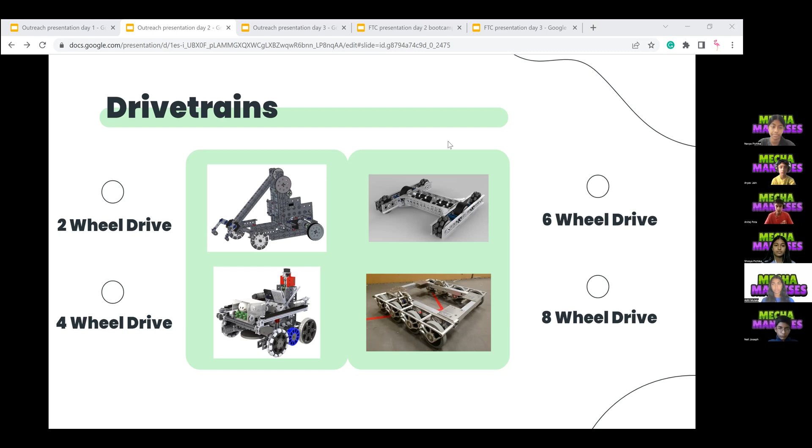The last type of drivetrain we will be covering today is the tread drive, which are wheels attached to a tread or belt. Some advantages of this type of drivetrain is that it can run on any texture of ground, has good traction, and it doesn't take up too much power. However, some disadvantages are that it isn't very fast, it is hard to build, and it is prone to damaging.

Now we'll be moving on to the different types of intake systems. The two types of intake systems commonly used in FTC are roller-wheeled intake systems and tubing intake systems. In the roller-wheeled intake category, there are a variety of intake systems, including compliant wheel intake, foam wheel intake, and rubber band intake.

The compliant wheel intake has wheels that spin, and those wheels are attached to movable claws. Depending on the size of the object the robot is trying to pick up, the compliant wheels intake adjusts itself to fit that object. Now let's move on to the foam wheel intake, which is quite similar to the compliant wheel intake, but the only difference is that the wheels are made of foam.

And lastly, the rubber band intake, which is basically a container made up of rubber bands so that the robot can intake elements of weird and different shapes.

This type of intake system is most commonly used with elements that are spheres. Some advantages of all these types of intake systems is that they are very controllable and great for picking up elements that vary in size. But the disadvantages is that they can only pick up one element at a time, which makes them inefficient.

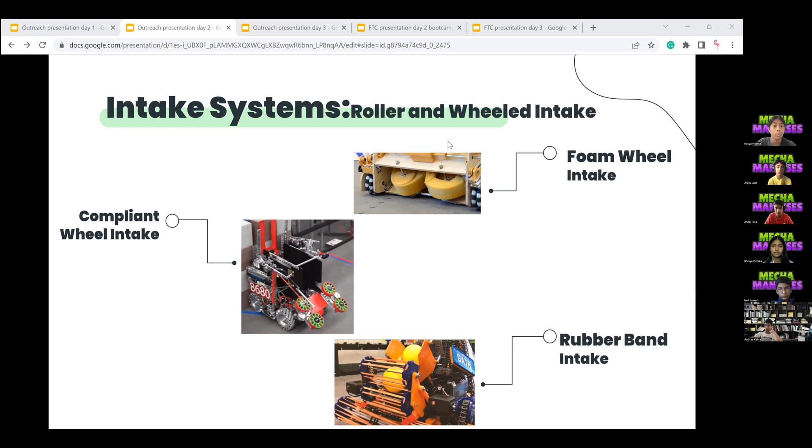Now we will be moving on to the tubing intake category, which consists of the surgical tubing intake and the 3D printed intake. The surgical tubing intake is a roller that has surgical tubing attached to it, so as the roller spins, the surgical tubing will be able to intake the object.

Next is the 3D printed intake, which is similar to the surgical tubing intake. However, the only difference is that the surgical tubing is replaced by 3D printed parts.

Some advantages of the tubing intake systems are that they could collect multiple objects at once, and it is more efficient than the other intake systems we've covered, and can intake objects of small and weird sizes. Some disadvantages are that it requires a lot of rotations per minute, or RPM, and you have less control over how many objects you're intaking.

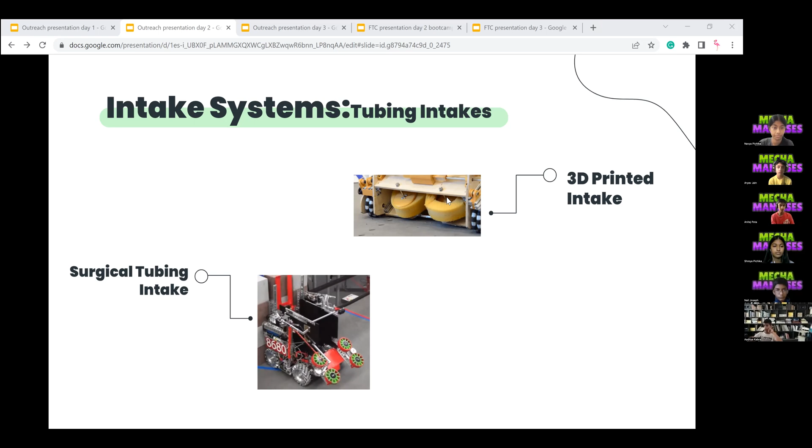Now let's move on to the outtake systems. We're going to just discuss the linear motion outtake systems. Linear motion is defined as motion in a straight line, so it just goes up and down. There are many different types of linear motions, but today we'll just be covering rack and pinion, linear actuators, and linear slides. First, starting off with the rack and pinion.

The rack and pinion works by using a gear to move an extended piece. Connected to the extended piece is a rack, and basically the gear has to move up the rack to move the extended piece up. Some advantages about this is that it's reliable, strong, and powered in both directions of movement. So when the gear moves up the rack, it moves the extended piece up.

But when the gear moves down the rack, the extended piece moves down. However, the rack and pinion is bulky and heavy, which can lead to some problems in the tournament. It's not really good to have heavy parts because that makes your robot a little bit slower, which isn't good.

So now let's move on to the linear actuator outtake system. The linear actuator works by having a lead screw, and the lead screw works with the metal bar that extends outward. So the lead screw and the metal bar are kind of attached to each other, and when the lead screw spins, like you guys have seen a screw, right?

So when it spins, it tightens or loosens, which causes the action for the bolt to go up and down. The many pros of this outtake system include the most torque, which means the force that causes an object to move along an axis. It's really reliable and can't move downwards despite the amount of force being put on it, and it's useful as it can maintain its position under compulsion.

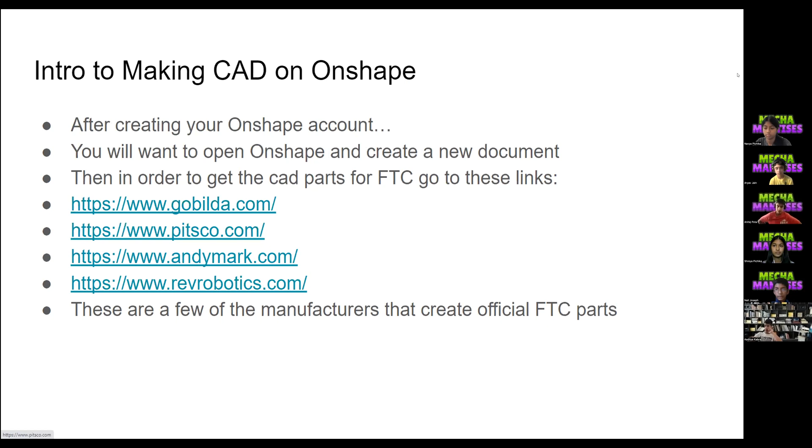Pitsco creates the parts for FTC under the brand Tetrix. On the website, search up Tetrix and choose the parts and kits that you want. Under every description, you can find the step files, CADs, for each of the sizes or types of the part. These are what you import into the CAD software, which for this tutorial is Onshape. Tetrix parts are usually more lightweight and less durable than other manufacturer parts, so keep that in mind when creating the CAD.

GoBilda is another manufacturer you can buy legal FTC parts from. Like Pitsco, under every description you will find the CAD for the parts shown. However, GoBilda downloads these parts as a .zip file, so you actually have to extract it, which I'll show you later on.

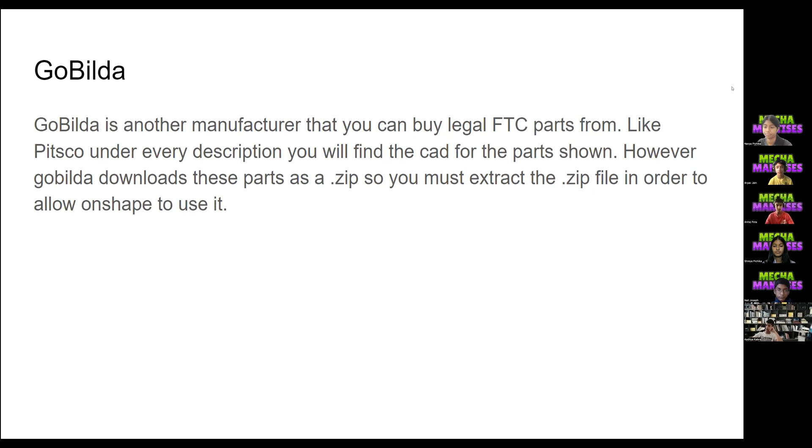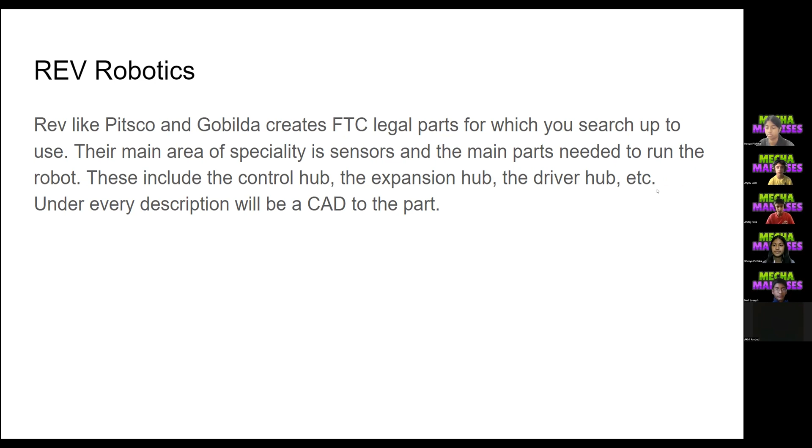Rev Robotics, like Pitsco and GoBilda, creates FTC legal parts which you can search up on their website. However, they mainly specialize in sensors and the main parts needed to run the robot, including the control hub, the expansion hub, and the driver hub.

Now I'll show you where you can go, here are some of the links. I'll mainly be using GoBilda parts for this demonstration, but you can go to each website and see the description. I'll be making a basic CAD of basically just a motor connected to a wheel, so we'll first find the motor.

GoBilda offers many different motors, all at different RPMs. When you click on the link, you'll find the description, and underneath it you will find the step file, so just download it. As you can see, it's a .zip file, so you have to go to File Explorer.

The process is similar on a Mac, but this is a PC, so go to downloads, then extract all, extract, and this is it. Okay, so now we go to Onshape. When you go to the Onshape website, you will find this, so I'm just going to go in. One second.

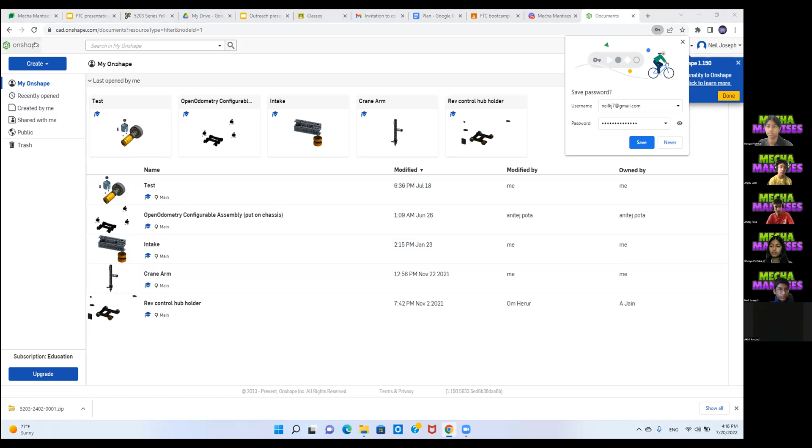When you log in, you'll find a screen somewhat like this. You'll want to go to Create and then Create a Document. And when you load into the actual CAD interface, this is what you should see.

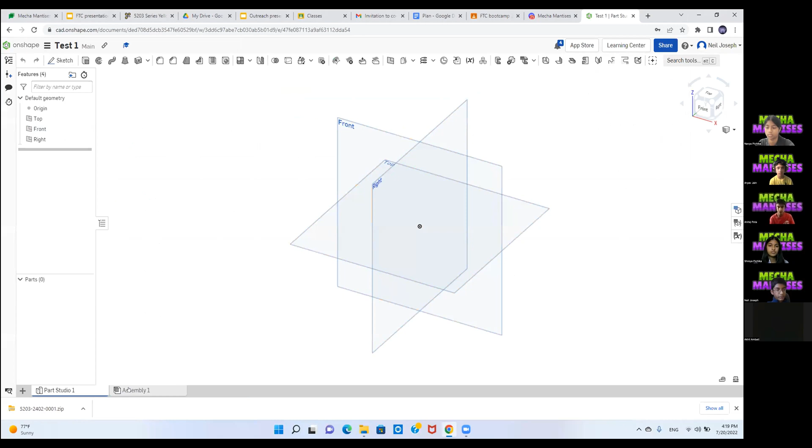Here's your part studio, so basically any custom parts that you want to make. And then this is your actual assembly, where you take all those parts and put them into the assembly.

So if I want to import the motor that I just downloaded, you go to Import, and you go to Downloads. And like this, you should.

For motors or any complex parts made of many parts put together, if you create a composite part, then when you're making the CAD and attaching it all together, it stays together. If you don't create a composite part for these complex shapes, CAD will actually separate it out. So for anything complex like a motor, you'll want to create a composite shape.

As you can see, upload in progress. And now I'm just going to go back to get the other parts needed for this.

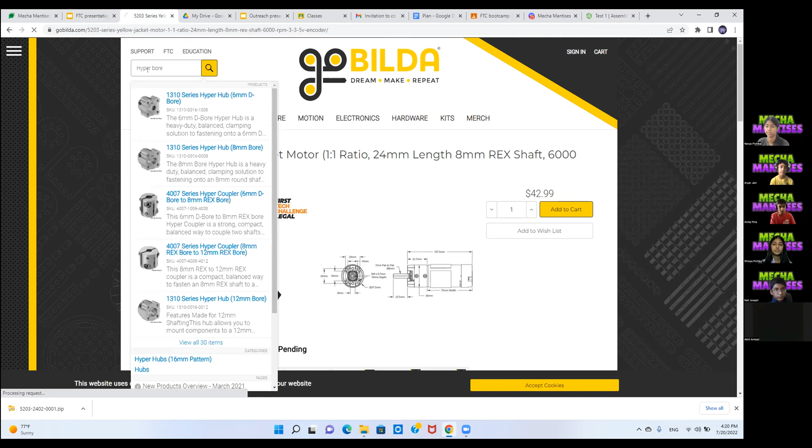So a Hyper Hub is actually what you use to connect an axle to the wheel. Step file.

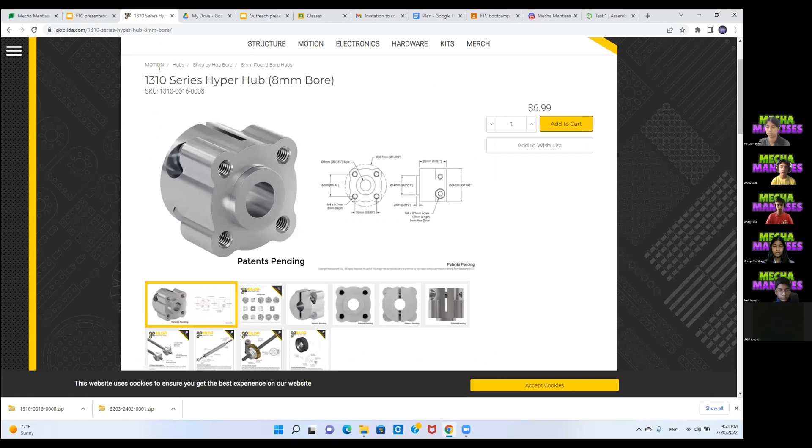Extract. Extract on.

Okay, so now I'll go to Onshape for this. So for wheels and shapes that aren't made of different parts, you don't necessarily have to make a composite part, but I'm going to do so anyways.

And while that is happening, I'll go ahead and import. It will take a little bit of time for it to show up in your Part Studio, but once it does, you can simply click on it.

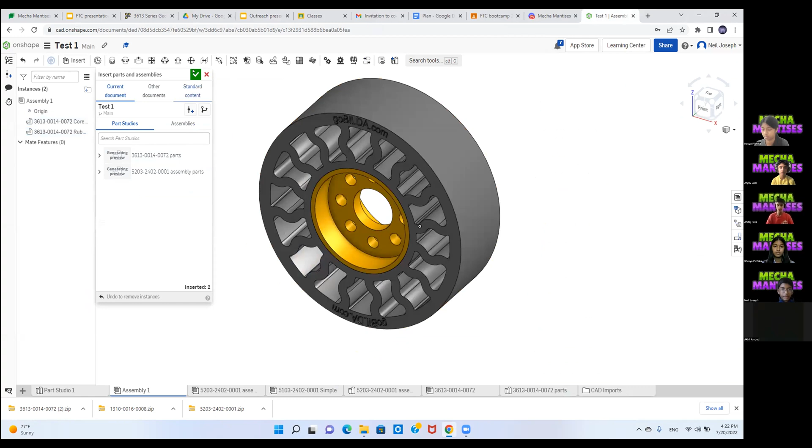Here's our wheel. Now you want to just press it down like that and check mark it. And so now you have a wheel in CAD. So now if I do that, I can now insert other parts into here.

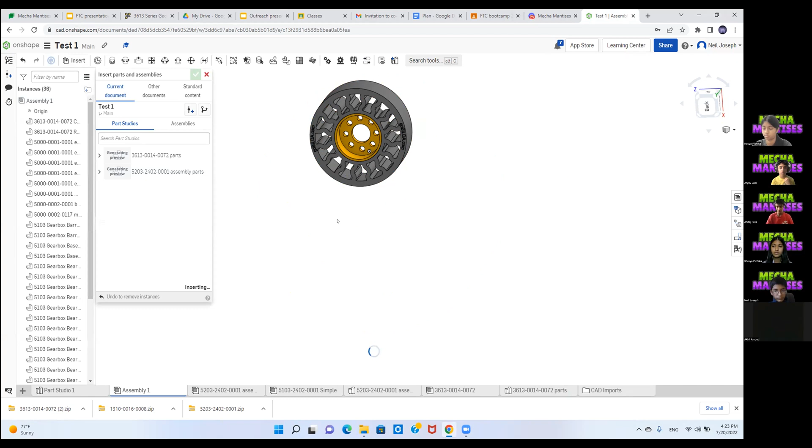That is interesting.

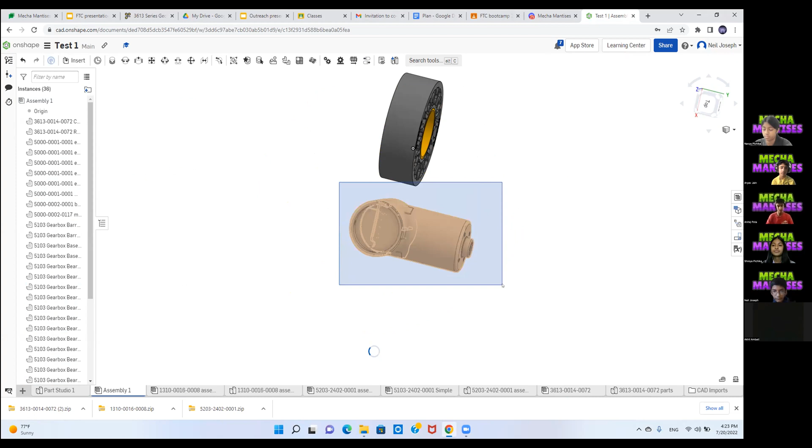And I'll go back to our file explorer, go to Downloads, extract all, extract, and I'll re-import this.

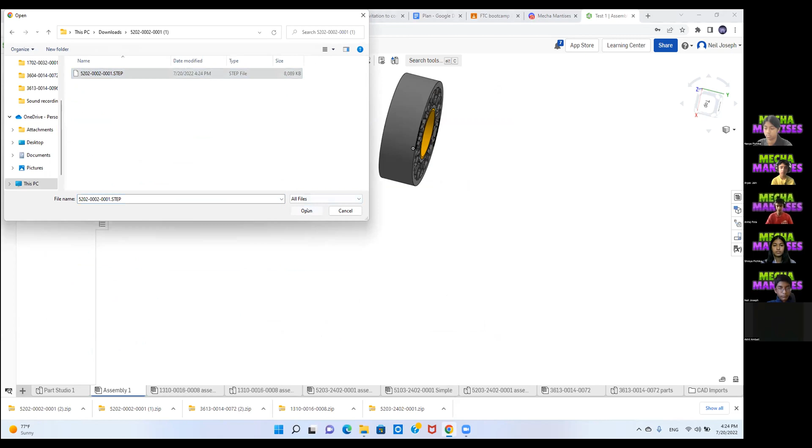So once you've gone to import all of your parts for the CAD that you want to create, you can insert it, and then you can connect it in many different ways.

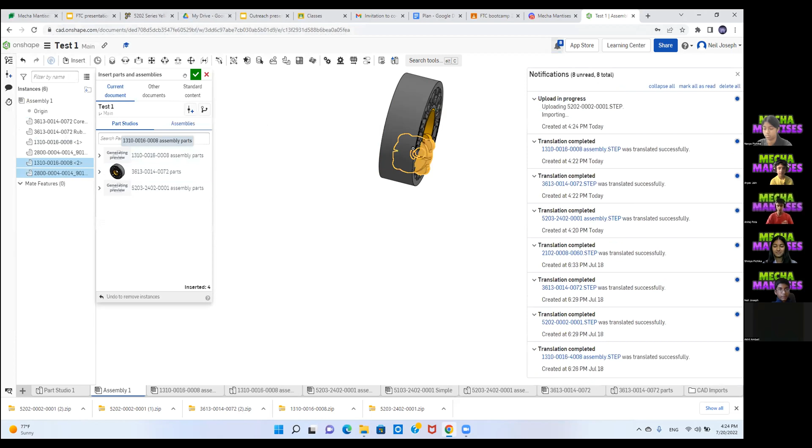So the main part that you want to use, so this is how you move your parts around, using this little tool.

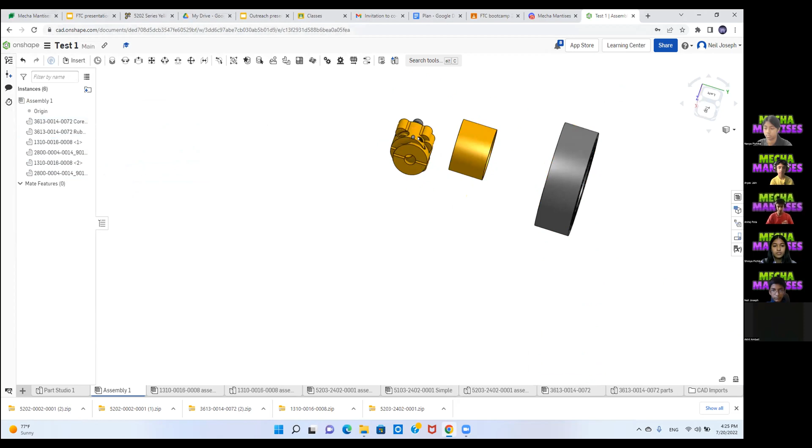So if you need to ever delete a certain part of this, like here, then you can see.

Okay, now that's done. So this is your fastening, and this is what you're actually going to be using to connect this to the wheel.

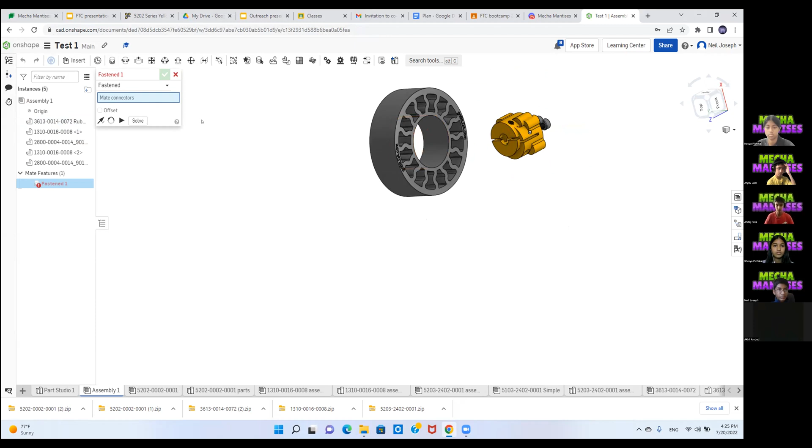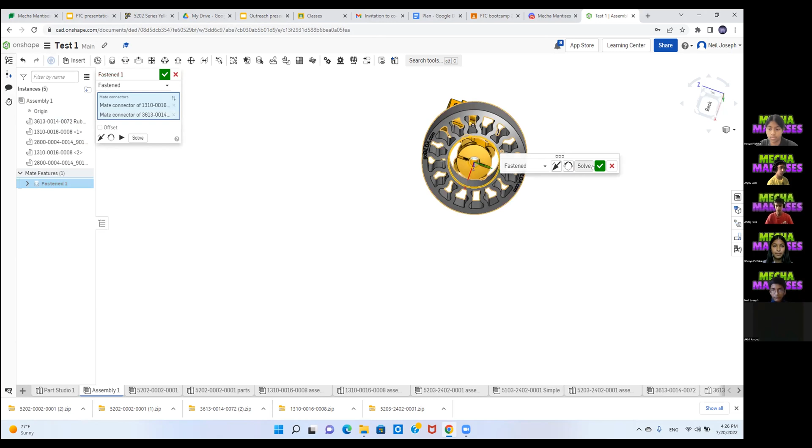So basically, if you hover over any sort of part, you will see this little target thing come up, and you'll want to come to the wheel here and hover over it until you find this target. So if you saw that little pop up there,

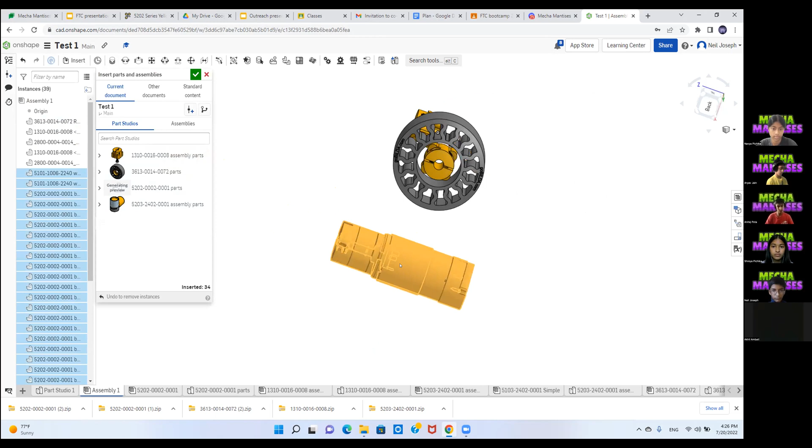let me go back to insert the motor. So this is a motor. Let's get rid of this.

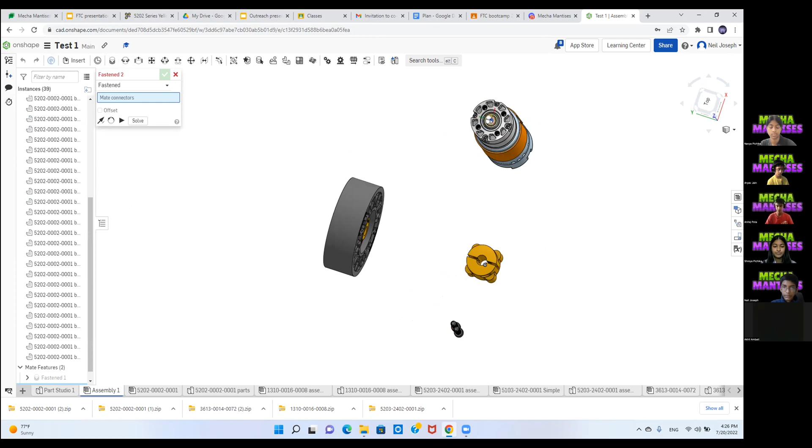Okay, anyways. So once you have your motor, you can simply attach it using the fastened mate. And going back here, you can attach it to the hyper hub.

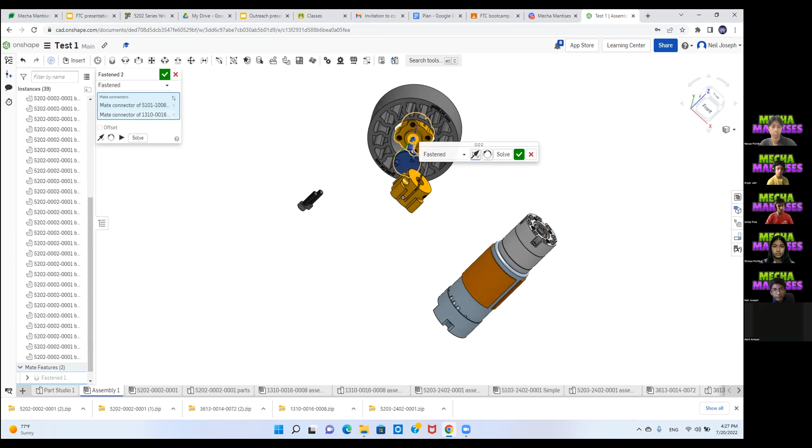And as you can see here, sometimes it doesn't translate correctly and it can go inside of other parts. So if you want to maneuver it correctly, what you can do is turn it around and stuff until it comes correctly.

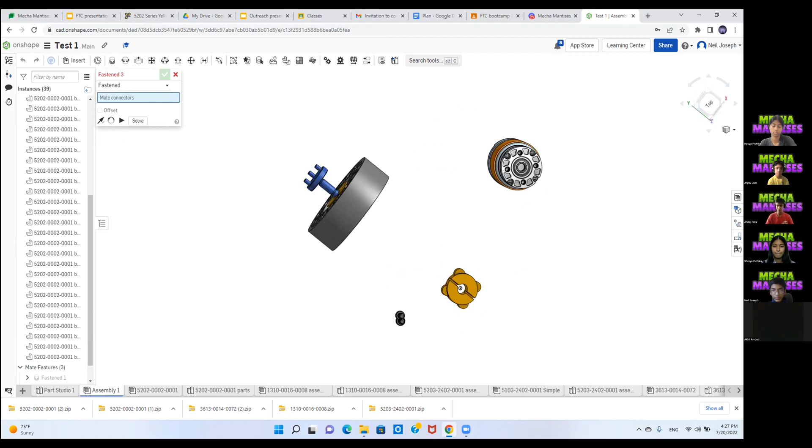I'll now go ahead and click this. And that is basically how you put a motor on a wheel.

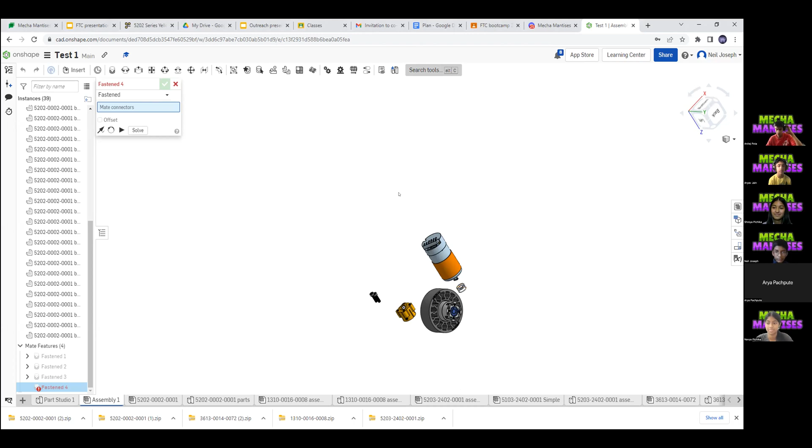Wait, so ask your question again. Can you restate your question? So my question was, you took a part of the motor and attached it to the yellow part of the wheel when you inserted that, but you moved the screen. So what was that for?

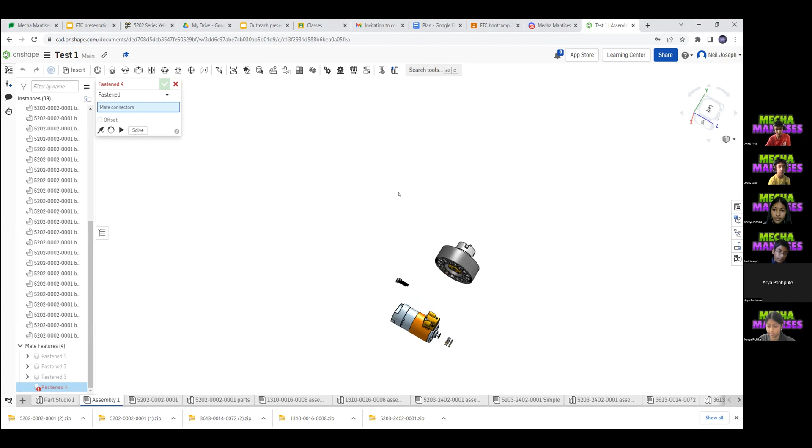So you said you have to get that piece, that's the correct piece to attach it to connect it. Are you asking why I moved the screen around so I could do this, like what I'm doing right now, or what are you asking? What you're doing right now when you're trying to connect one piece of the motor to the wheel.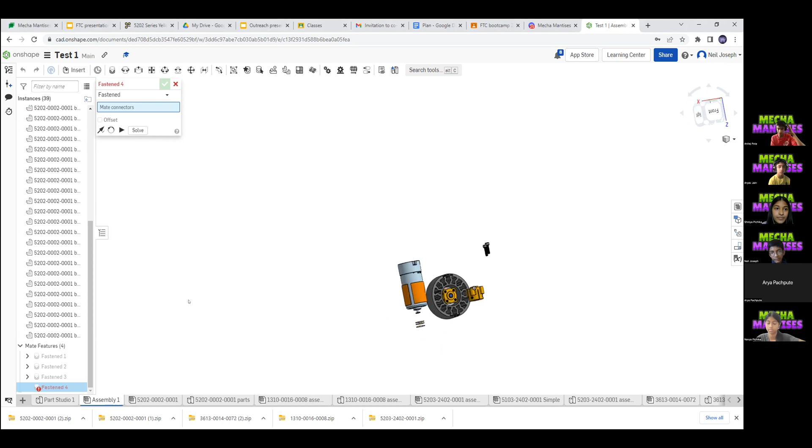Yeah, so I basically did that because the mate fastener, you have to get it to a correct sort of place or else it won't connect. It won't always go in the center right there, it'll click to something else. So you want to keep that in mind.

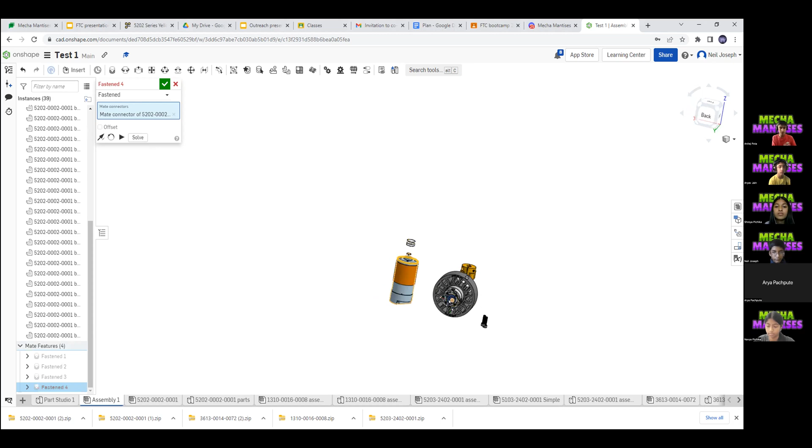So you're saying that when you move it around, that box has to appear on the thing you want to connect it to, otherwise it's gonna stick to something else? Yes. Or sometimes it won't even connect. So does that answer your question? Yeah, thank you.

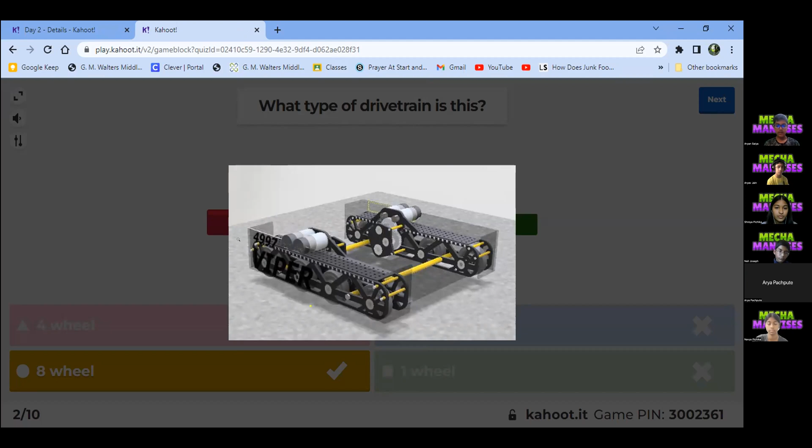Okay, so just look at the image. It's an 8-wheel drivetrain because if you look at them, there's 8 wheels on it, at least the visible wheels, so 4 on this side and 4 on the other, that's why it's 8-wheel drivetrain. Also, one of our team members is playing along, so you guys could have a little challenge. Never mind, he got kicked out.